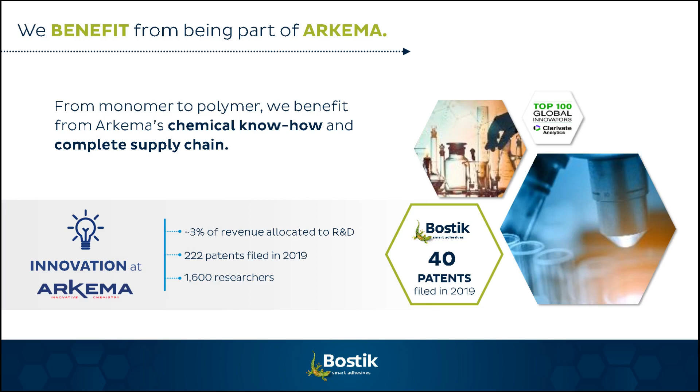So, as mentioned before, we are part of the Arkema family, and Bostik contributes to, but also benefits from, Arkema's know-how in specialty chemicals and great support concerning material science. Another implicit benefit I would like to highlight today is that we take advantage of the complete and integrated supply chain of Arkema to formulate our adhesives. I mean that Arkema is supplying the raw material that we are using to formulate our products.

Nowadays, as you know, the world is looking for more sustainable solutions. And we have the responsibility to develop products that care for the environment and that can help our customers achieve their goals and reduce their environmental impact. That is the reason we put the focus on preserving our resources, eco-designing our solutions, and finally, making it easy for our customers to recycle their products.

For instance, we developed and designed a sustainable KIZEN range in order to support our customers in this kind of project.

So we understand that each demand is unique in the market, and it requires a specific approach angle to answer it. At Bostik, we have both product and service in order to address today's most pressing concerns for you, our customers. For instance, consumer safety and convenience, brand integrity, sustainability, and finally, scaling and innovation.

As Bostik, we are uniquely suited to meet modern challenges. Firstly, we complement conventional technologies with specialized adhesives unique to the market. Secondly, we specialize in leveraging collaboration for innovation, with a proven track record of successful joint development with OEMs. And finally, our products offer more than a simple bond, with extensive value-added functionalities, as we will see with Pascal Peroni afterwards.

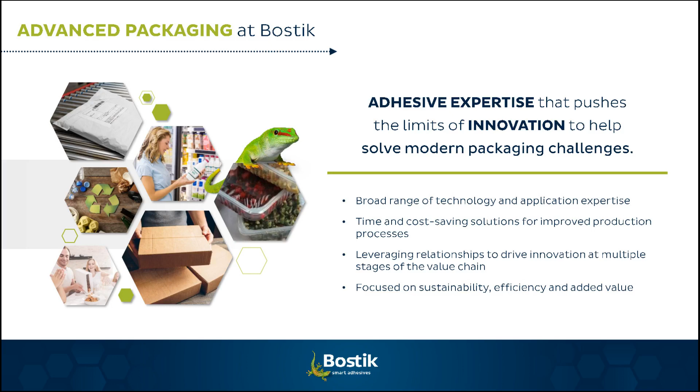Like our sister company Arkema, we have the commitment to innovation, and we are constantly making innovative products that go along with the future of the advanced packaging market. Some innovative technologies that we have pioneered for the past couple of years include our anti-fog heat seal coating for lidding applications, the pressure-sensitive adhesive devoted to resealable applications, and our KIZEN product line for, among others, case sealing applications.

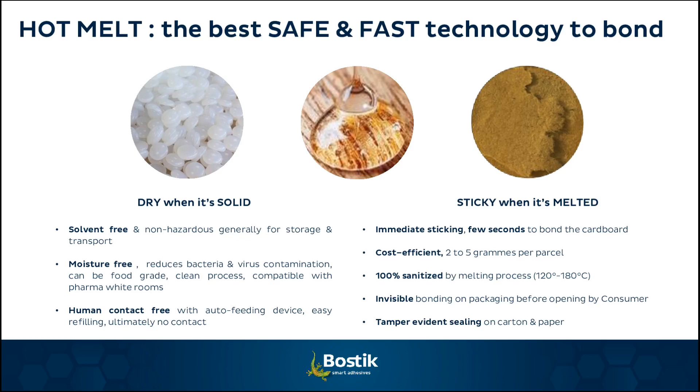What is our Kizen approach at Bostik? Kaizen means continuous improvement in Japanese. That's really what we had in mind when we developed this new technology. Before the year 2000, in the last century, hot melt EVAs were the most popular products. Afterwards, the hot melt metallocene was developed with improved efficiency. And in 2017, we developed and launched our Kizen technology, which is our best performance polyolefin technology today. We combine that with our best tools and processes and best technical expertise, especially in terms of adhesion and cost savings. Today, Kizen provides our customers very smart savings.

Let's review a very simplified process of hot melt application. First of all, you have a first part in blue, which is the storage and supply of the hot melt. It is in solid form, in pellets, and usually the best option is to use a container which will become an auto feeder for the melting unit. The operator will use some super sacks or small bags to fill this auto feeder, and afterwards the pellets will be automatically pumped into the melting unit, which melts the product at 160 to 180 degrees on average.

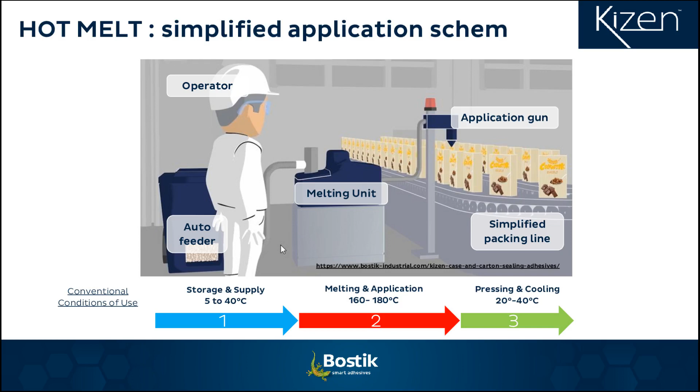It can be lower in some specific cases, to provide the application gun the necessary quantity of liquid hot melt, which will allow closing the box on the lines very fast. And in a few seconds, the product will be cooled to room temperature, which is very safe and very efficient.

What are the key benefits of our Kizen technology? First of all, at the bottom left, you can see that we provide to our customers some ergonomic bags which have been specifically designed to be easy to handle and easy to fill in the specific auto-filling containers. Of course, for bigger quantities, we can provide super sacks or big bags with a specific forklift that we will use to fill in this container.

But to be efficient, we need also to have a specific design of the pellets, which is not caking. And with Kizen, we have these specific properties we name free-flowing, which allow to have all the time a regular supply of the melting unit without any blockings.

The third point, which is really important, is to provide thermal stability. If you melt the hot melt at 170 degrees, the risk of carbonization of the hot melt is very high. And usually what we've seen in the past with the hot melt EVA especially, the product was going yellow, brown, and sometimes very dark, just due to the carbonization. With Kizen, up to 7 days after melting, during continuous melting, you will see the product staying at a very light color or without coloration.

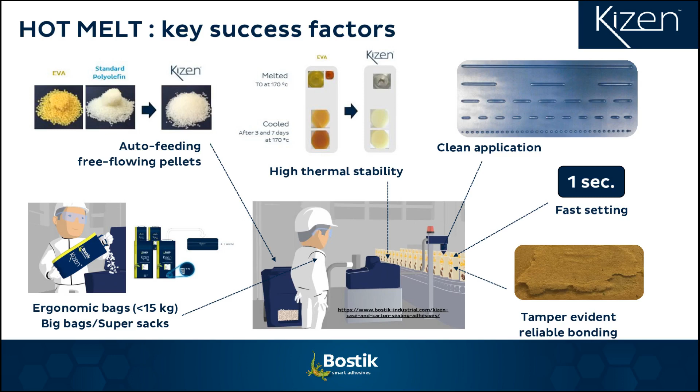The other point, which is absolutely wonderful with this technology, is the clean application. As you can see on the dot, on the top right, we can make very small points or small applications which are very clean and without any angel hair. The product can be bonded very fast, in less than 1 second, and at the end with a very strong bonding.

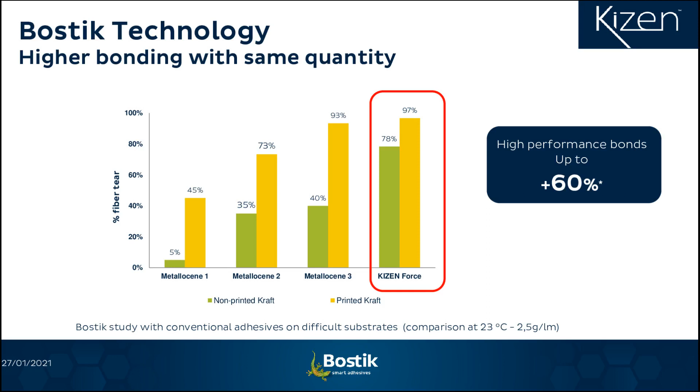Our experience is already very important with this technology, and especially Kizen has been used in the beverage industry. So, for example, here it's a company who has more than 20 lines. We switched each line in between 1 hour and 5 hours, because the Kizen technology is also very easy to switch, with very good compatibility with the previous generations. Here, in this specific case, the customer was using metallocene technologies, and we have been able, for all the lines, on average to save 10% of adhesive, which is very significant, and which allows in the future for all customers to have continuous improvement in their lines.

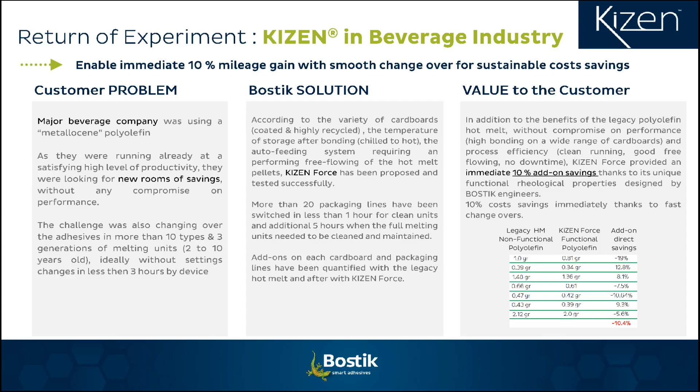Another very interesting return of experience was with a distributor. They have been able to reduce by almost 20% the quantity of adhesive and the cost, and highly reduce the complexity. They were using more than 14 products, some EVAs, some metallocenes, and with just one product, the Kizen Force, they switched all the products to this one.

The benefits of the Kizen Force are a very versatile bonding behavior on diverse cardboard types and the wide window of temperature resistance, below 0 degrees up to 50, 60 degrees in some specific cases. And you've seen that they were able to reduce the adhesive quantity by up to 35%.

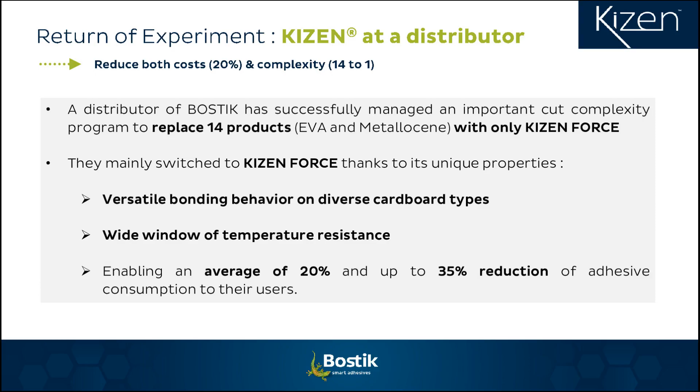So in a nutshell, our Kizen technology is very powerful. We provide 3 key benefits: the comfort, the security, and the efficiency, with higher performance bonds, ultra precise drops, reduced consumption up to 35% as you've seen, optimized maintenance with really long life possibilities, enhanced safety, and very easy switch.

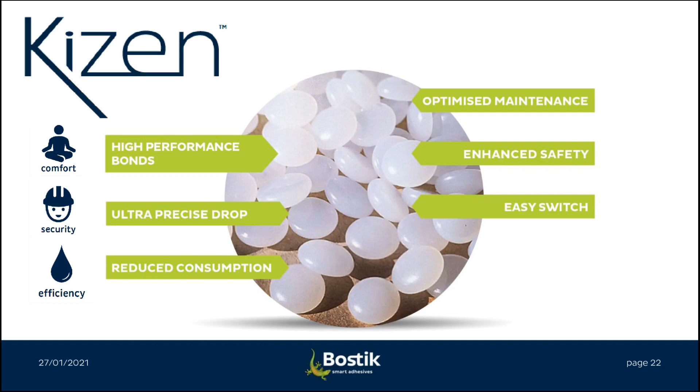Thank you very much, Pascal. So we already have three questions from the audience.

Yes. The first one is, what is the compatibility of Kizen with current hot melts based on EVA or metallocene? Kizen has been developed to be the most compatible adhesive with the previous generation. So with hot melt EVA and hot melt metallocene, in more than 80% of cases we have experimented, we have been able to switch the product in less than 1 hour.

So really, we reduce the quantity of the adhesive in the melting unit down to the bottom. We add the Kizen product and we flush. And in less than 1 hour, you can change from the previous generation EVA or metallocene to Kizen. That's really a very key benefit, and it's linked to its specific chemistry, which has a high compatibility with both of the very well-known technologies of the past.

Great, thanks so much.

So the second one is, in which country is KIZEN available right now? KIZEN has been developed to be a worldwide product, so the product can be used in all countries. It's produced in the 4 main plants that we have in the world. So even if you are in whatever country in Africa, Middle East, or in the US or in China, you can benefit from the same properties.

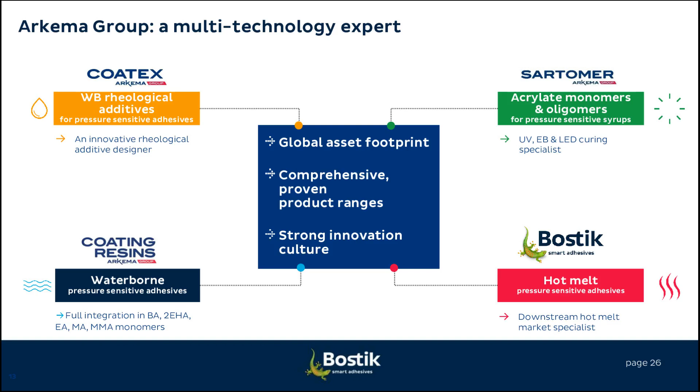Through the business unit called Sartomer, Arkema Group is highly involved in the, let's call it the UV framework, producing different kinds of components. It's one of the world leaders in, let's call it that way, UV chemistry. And Bostik finally, which is mainly promoting hot melt adhesive and also some other adhesive technologies that I mentioned earlier.

Basically, what we do with our customers is that we really intend to be regarded as a strategic advisor to help you address the various challenges you face, whether they are technical, or linked to market and product positioning. We can work with you, explain to you what is available in the market, what those various adhesive technologies can bring, how they position one to another, how to optimize your coating processes, and what extra performances you can get through some adjustment program that we can design with you.

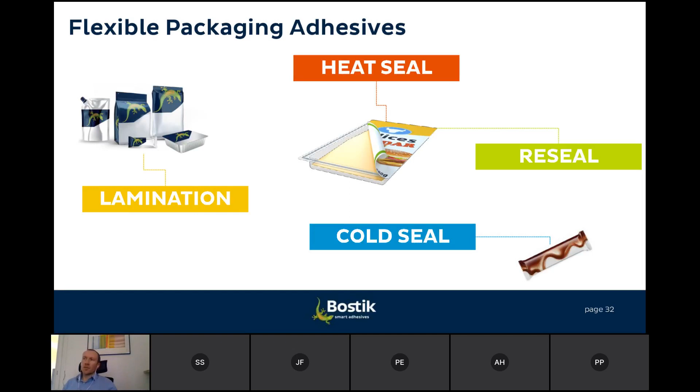So indeed, we are going to talk about the flexible packaging market segment right now. And I have to say, Bostik delivers basically various technologies for the flexible packaging segment. We have, let's say, specialty products, which are the sealant technologies, and my colleague Jean-François will cover that part. So I'm going to focus on the lamination adhesives for flexible packaging.

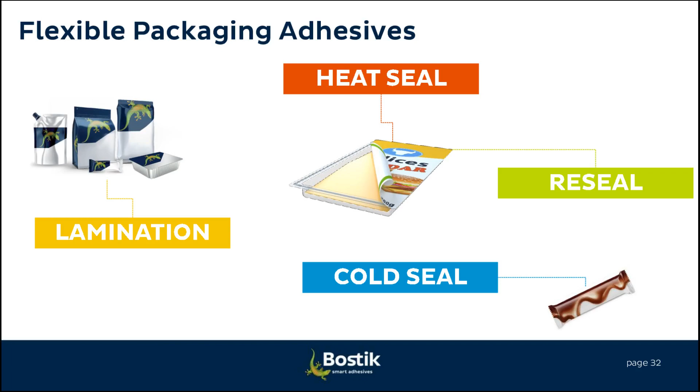Okay. So flexible packaging, as you know, provides a number of features from aesthetics to preservation and shelf life, going through robustness and safety, food safety, you name it. So many, many features. So there is no doubt that indeed it has replaced quite advantageously the rigid packaging in the last few years, quite extensively, I would say.

And to provide all this, of course, there is a need to somehow combine the different functions by combining different webs or films. And the enabler for these smart combinations is of course the adhesive you might use. Now, the complexity and the versatility of the flexible packaging structures and applications forces the adhesive supplier to really develop smart adhesives in order to comply with all that.

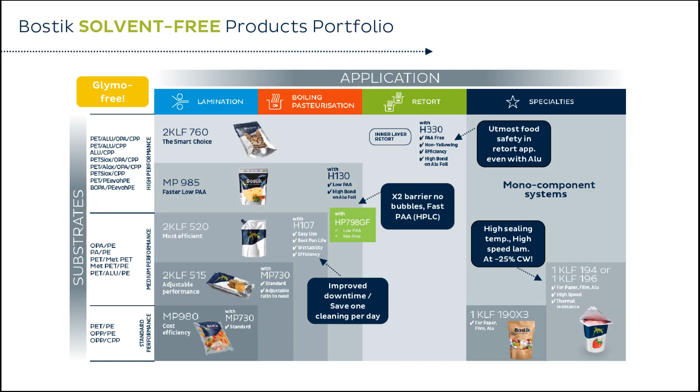Now, of course, you have the solvent-free technologies, and we also have the solvent-based technologies. Not going into too much detail here, since we probably don't have the full time. What you can see already is that the number of adhesives is more important, and the reason being, with solvent-based polyurethane adhesives, you can target more highly demanding applications with higher requirements in terms of mechanical deformation or thermal treatment.

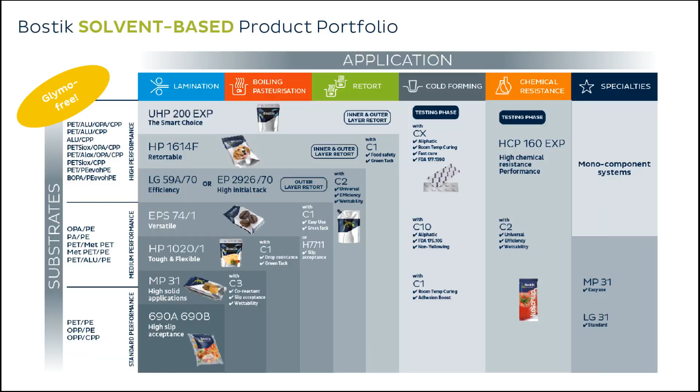So, for instance, if you pick up coffee capsules or heavy pet food bags, you will end up with probably a solvent-based polyurethane adhesive. So once again, I've made a kind of a selection to present you today.

There is, for instance, LG 59A/70, which is an extremely versatile product, well spread all over Europe from us, because it provides a significant cost reduction on the machine, with coating weight savings going down from 15 to 20%.

You might want to have inline lamination, and therefore the need for an extremely good green tack right after your lamination to go into the next step of the lamination. And then that would be EP2926, that we launched basically last year.

If I have to focus really on the high performance market applications of flexible packaging, we have just launched two newly developed products, which are UHP 200. It's a modular system going from aromatic to aliphatic, and even room temperature pure aliphatic system, so that you don't need a specific temperature control room to cure the adhesive. And then you can do basically all kinds of applications and structures. This is the top performer of the adhesives.

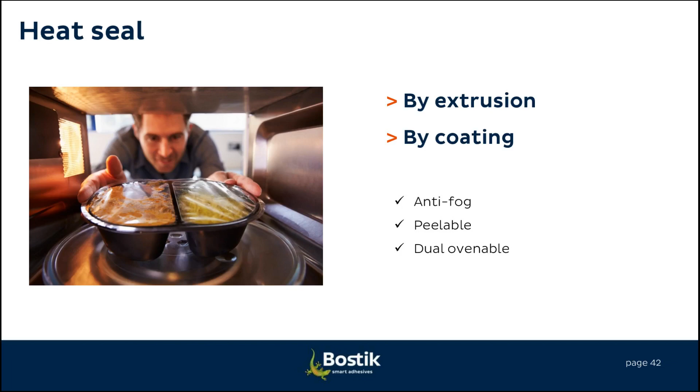Our Vitel resin can also be used in the formulation of products for the interior coatings of cans, where epoxy resin is banned due to the presence of BPA.

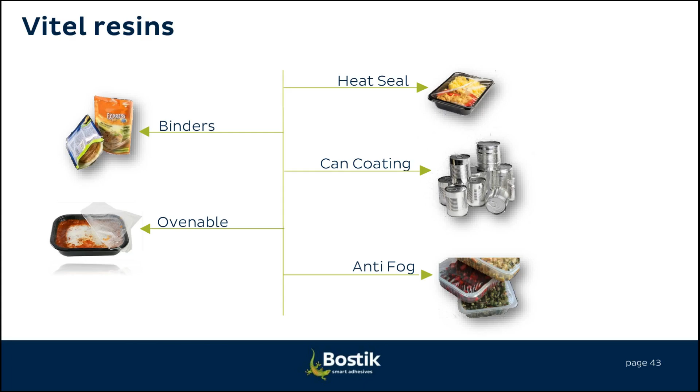Another very interesting specialty is Reseal technology, which Bostik developed about 20 years ago. Bostik was a pioneer to introduce this concept and, by the way, is the worldwide market leader. This Reseal technology is made through blow co-extrusion. The product is presented in free flowing pellets, and it's blow co-extruded between several layers - could be 3, 5, 7, up to 9 layers. But basically the market is between 3 and 7 layers, including a barrier EVOH.

What makes the success of our technology are several benefits: convenience, very easy to use, the fact that no capex is required all along the value chain, minor adjustment of settings on the packaging machines, and extended shelf life.

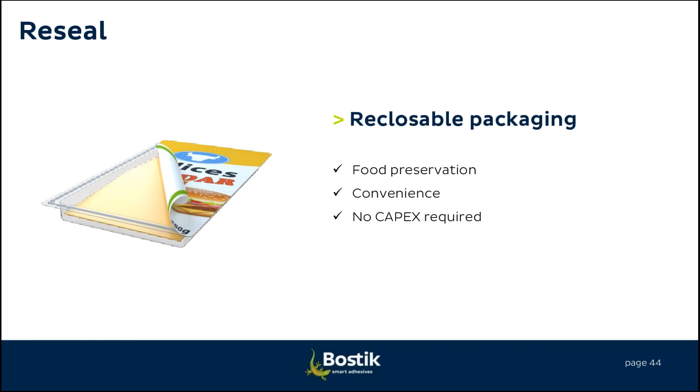The Reseal system is used in a premium market segment for reclosable packaging. Examples include multi-portion packages, pre-sliced meat, smoked meat like turkey, pre-sliced cheese, sausages, and new applications appearing in the UK and US for fresh produce, vegetables and fruits, which can also be very interesting.

Sustainability has become a primary focus for the packaging industry, including for reclosable packaging. At each level of the value chain, Bostik has obtained approval that our Reseal products are compatible with the PE polyethylene film recycling stream in Europe, and the assessment that our reclosable system complies with the recyclability guidelines for thermoform trays. So we are completely in line with market trends, and now it's not a question of competing with heat seal or peelable film - you can add this reclosable feature to your packaging while remaining respectful of sustainability.

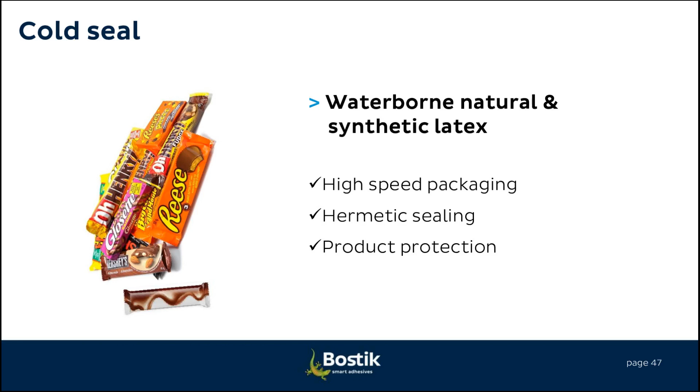A third specialty I'd like to introduce today is cold seal. Unlike heat seal adhesive, cold seal makes a seal only by applying pressure without the need of heat. This prevents fumes from affecting chocolate and deteriorating its smell and taste. Cold seal was originally designed for chocolate bars, but now has many applications, like energy bars for example.

You also see specialty snacks, frozen ice cream, bakery, high barrier, and many new applications coming from this. Bostik, for this range of cold seal systems, is a market leader in the USA, and our products are specified by many brands. Thank you.

Thank you very much, Jean-François. We have just one question: did you study the impact of your reclosable adhesive on recyclability?

Yes, indeed. We conducted many trials with some institutes. If you consider that the tray can be made of polyolefin or amorphous polyester - PVC is no way - we have the certificate that our system, our reclosable system, complies with the PE recycling stream you can find in Europe. We have the certification, and in addition we work with a recycler to be sure we are not negatively impacting the recyclability of APET when used as a tray. So today we cover all kinds of applications within tray, within polyolefin - could be PP, PE, or APET. So we are in line with the market trend.